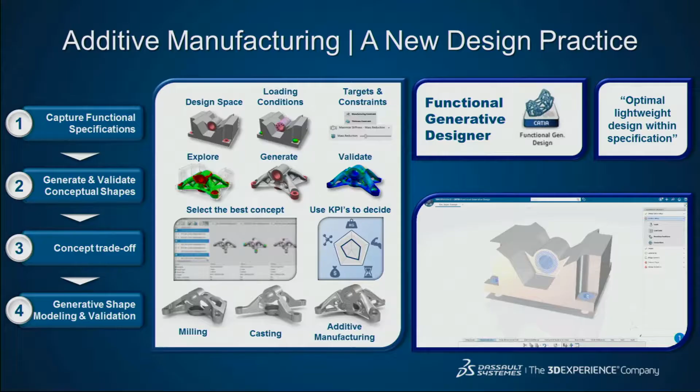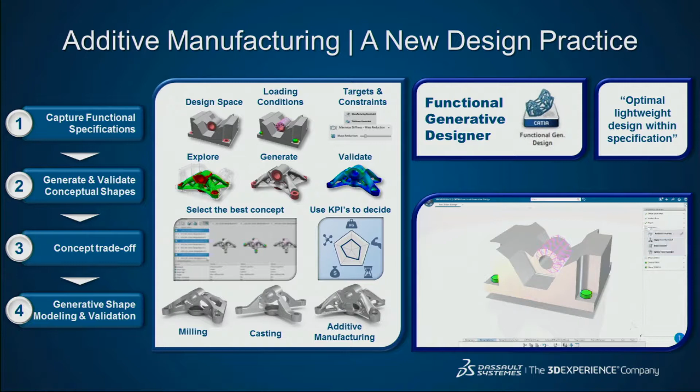So to start off with, we're thinking about the design side of things, and a lot of people are talking about generative design already. So we've got this capability in here. We're looking at the design space you can work in, the loads, the conditions, the constraints. We're looking at different ways of exploring what we can get out and what are the different manufacturing methods. We're not always going to go to additive, we might go to casting or milling or something like that instead. So there are different solutions that come out.

When we look at the topological optimization, there are simple topological optimizers out there, but we don't believe they're good enough because there are small nonlinearities, and if you include those, they can have quite a dramatic effect on the outcome of your optimization. So you need to include them, otherwise you're missing the mark.

We also need to think about, once we've got that topological optimum, how do we actually smooth it down? If you talk to Aldine, this is one of his big bugbears, these rippley surfaces. So you need to first be able to smooth them. Second of all, maybe do some quick, direct modeling on it. But ultimately, our customers are telling us what they really want is a proper, feature-based parametric CAD model. And we can get them there.

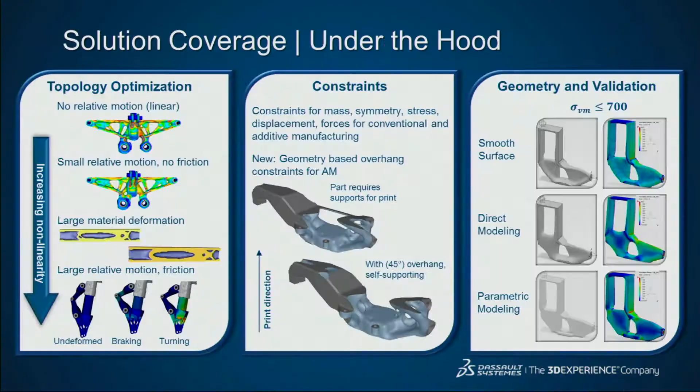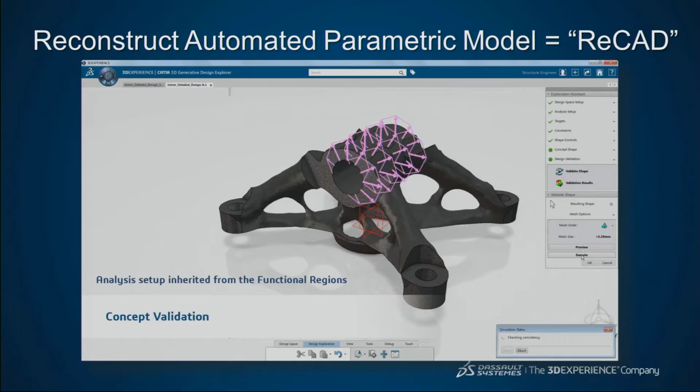So how do we do this? This is a process that we call ReCAD. You're basically taking this kind of dumb lockdown model, a bit like an imported IGES file, and you're now actually rebuilding it as a proper parametric feature-based CAD model. If I jump to this part of the animation, you can see we slice through the model, and it builds and lofts the various different sections, and then automatically rebuilds this model for us. So it's manually controlled, but highly automated. It takes something that could take you hours or days, and allows you to do it in minutes, but you're still controlling it.

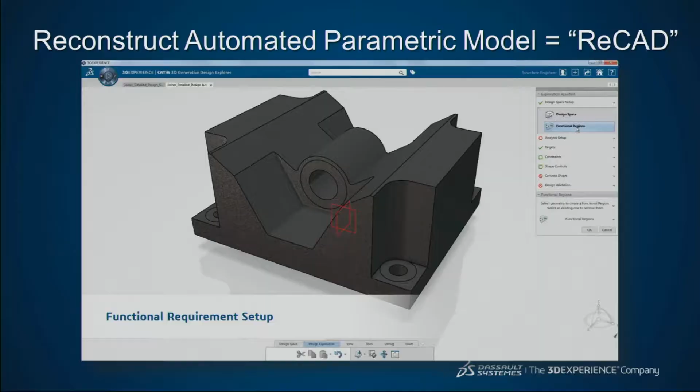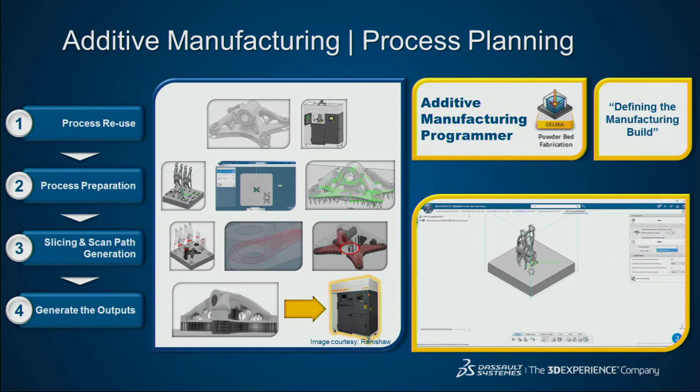We're also thinking a lot about manufacturing, because this is a whole design for manufacture exercise. We're thinking about the orientations of the part, the slicing, the laser paths, all of this kind of stuff, and making sure we include that as part of our modeling. We're thinking about how we're positioning parts—are we having multiple parts in one print run—and are we thinking about the support strategies?

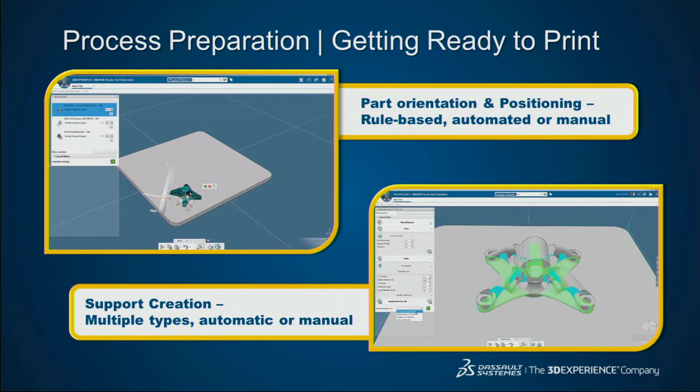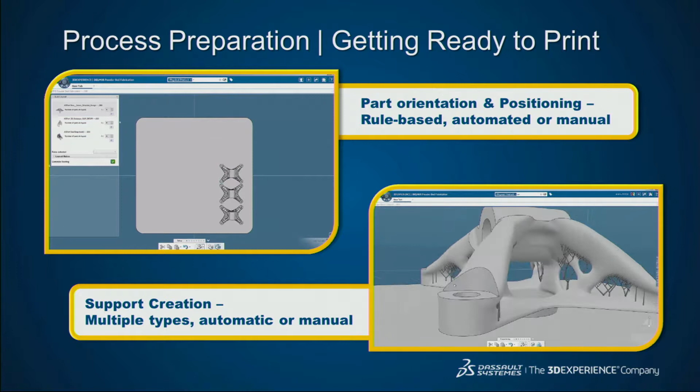I can't compete with what nTopology are doing—they're doing some great stuff there—but we've got some automated support strategies we can put in, where you can take a template, populate it, and just extend it and automate that design. So you've got to follow a company standard.

Most importantly, we're also looking at what the actual specific machine is doing. In this case it's a Renishaw machine, but it could be from any other company, and we're making sure we're modeling what goes on in that specific machine. All the machines are different, so we have to have different settings that we pull out of libraries.

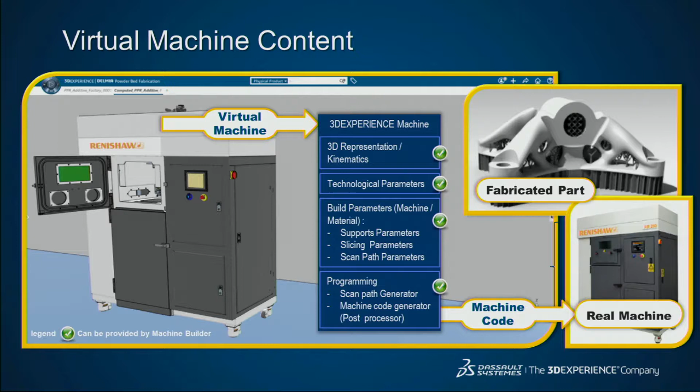Then we get into the bit I'm most passionate about, which is the actual simulation of the manufacturing process itself. You can see we're actually adding material, doing all of the thermal things as well—it's some really powerful, complicated simulation that we're running here.

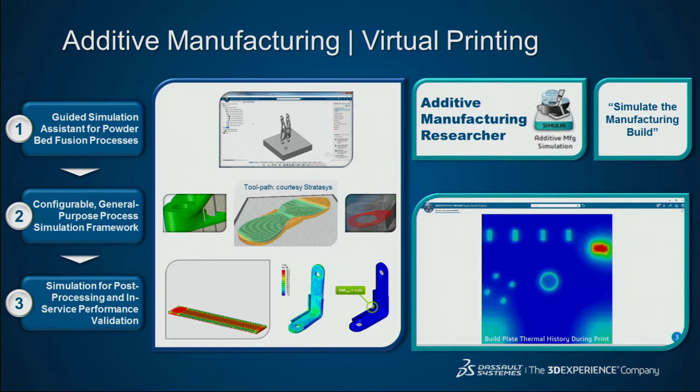We're looking at all of the thermal effects, because you're going through massive thermal fluctuations. You end up with all these weird residual stresses between the different layers, and you end up with warping and distortion. You can also end up with problems where, because of the way the part moves in the printer, the printer can actually stop—and we want to be able to predict where those errors might occur.

We have some customers who are actually having parts that are breaking and failing while they're being printed, and we want to be able to predict if that happens. Because if it's cracking as you're making it, it's not any good, is it?

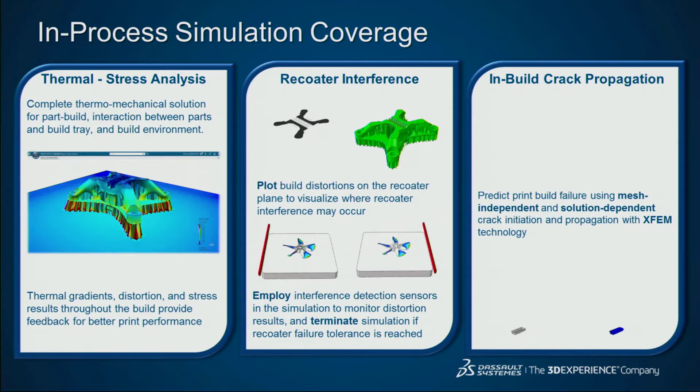We want to think about what happens to that part once you've made it. You take it out of the machine, you're now going to put it onto an assembly or a product, and it's going to have its own in-situ stresses applied to it. You're making it out of metal because you want it to be strong, so it's got to carry quite considerable load. But you've also got to think about those residual stresses that are in it before you've even put your real load on it. And we want to think about durability, fatigue, and how long it's going to last.

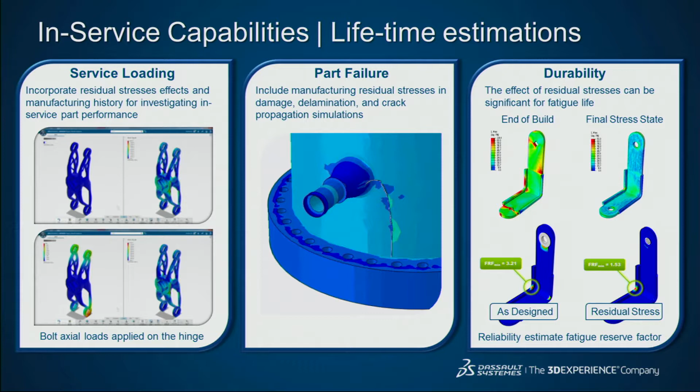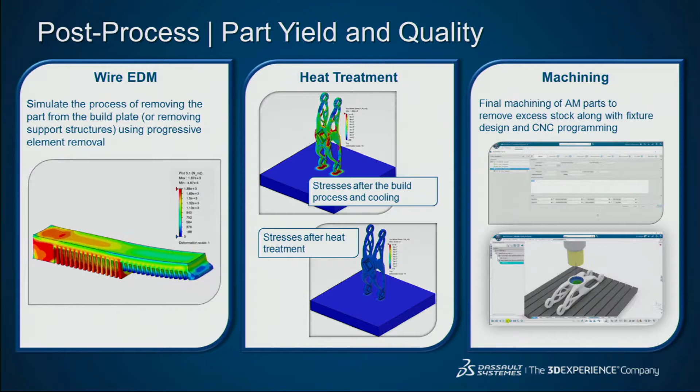We're also going to think about things like machining away the various support structures, and post-machining of the parts, such as where you might have a bearing or something—because often the part that you 3D print is not the final part. You've got to do some additional work on it, and you've got to include all of that in your calculation.

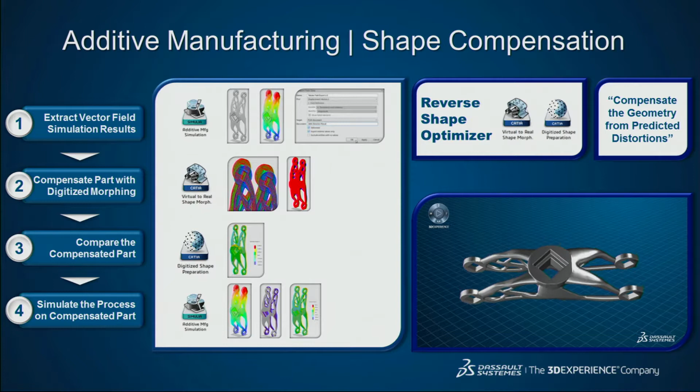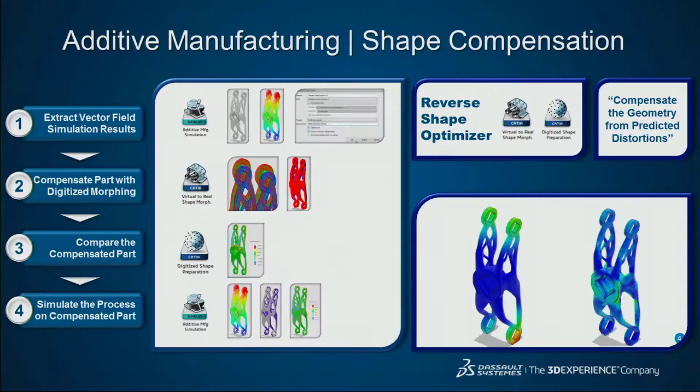This bit I think is particularly cool: we see parts that come out of the machine warped and distorted—it's an inevitable fact of the way these things are printed. What we want to do first is minimize that and understand it. But second, if we understand and can predict it, we can do a reverse morph—we apply that warping to the part before we print it. Then as it's manufactured, it warps into the right shape as opposed to warping out of that shape, so you end up with the correct shape you wanted rather than something a bit off.

If you think about it, what we're trying to do is simulate the process, simulate the physics, and simulate all the different materials. I've spoken about metals, but of course there's a wide range of polymers as well.

We worked with a lot of different companies to validate this. Specifically I'll pull out TWI, based here in the UK, and Oak Ridge National Labs in the USA. But you can also see HP, Stratasys, Purdue, ARL (Army Research Labs in the USA), and Simtech, which is like the Singapore equivalent of MIT.

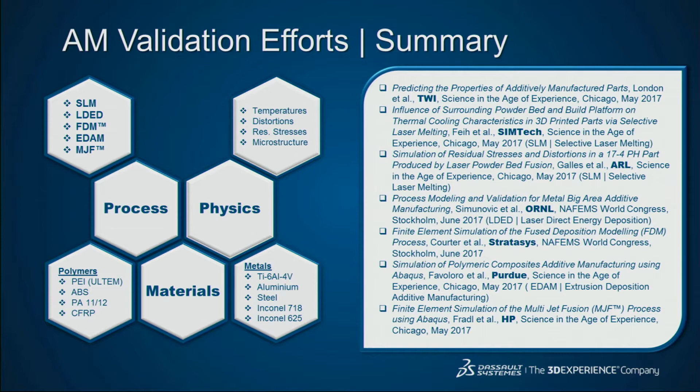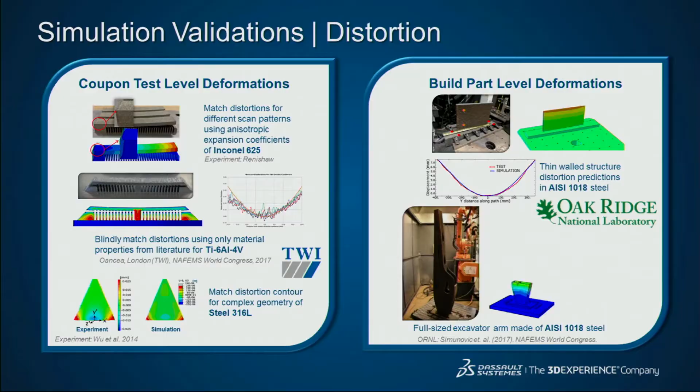So here's a couple of examples, one from TWI and one from Oak Ridge National Labs. These are real products, tested, validated, proven. It's not us saying it's accurate, it's these people — you can go and talk to them, and they'll tell you about it.

This guy at TWI, Tyler London, has done a lot of work. You can see here experiments versus simulations, great correlation. On the right, you can see some defects and porosity problems that they had, which the simulation predicted. That's perfect — it's spotting problems before they occur, so you can do something to minimize or get rid of them.

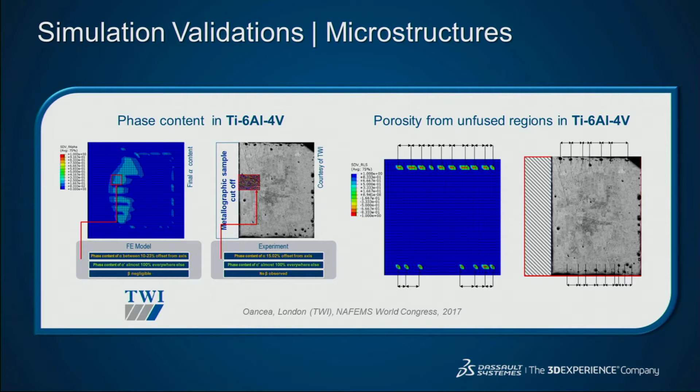Here's some more work that Tyler London has done, first on wire arc additive manufacturing, and second on laser metal deposition. So he's working across all sorts of different materials, processes, methods, and machines.

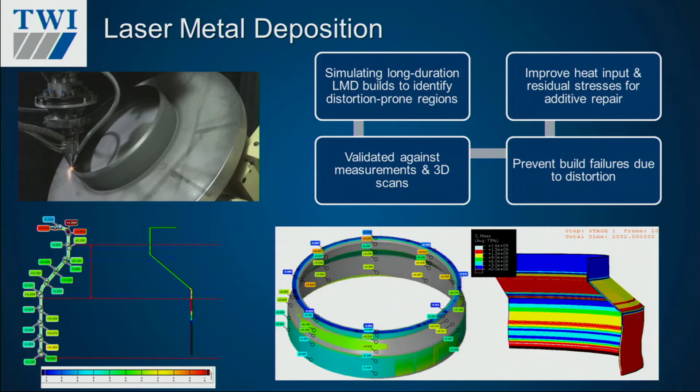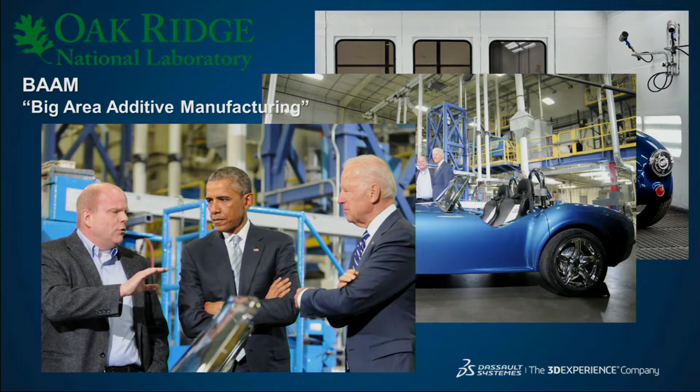Oak Ridge National Lab's glory example was when they decided to create a Shelby Cobra. They got plenty of publicity like this — they basically made pretty much the entire car using additive manufacturing. This was a factory tour they had, with a couple of guests. If you zoom in, you'll see Barack Obama and Joe Biden visiting them. Obviously that dates the slide now, from a couple of years ago.

We're also looking at all sorts of variabilities. Here you can see one particular part, and we're using four different laser paths to figure out different ways we could make it. What's the best one? What are the different variations, and the pros and cons between them all? Let's do that investigation before committing time and money to actually making this part, so that when we do make it, we make it as best as we can.

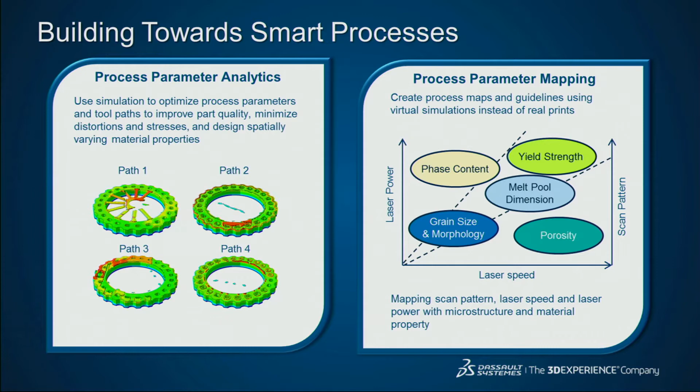So if I revisit the whole set of technology components I spoke about at the start, I think this is the list we need. We need generative design, a good powerful CAD system to manipulate shape, a whole host of different simulation tools such as advanced solving, topological optimization, variation exploration, and durability, and sophisticated, powerful manufacturing and production planning, understanding, and modeling.

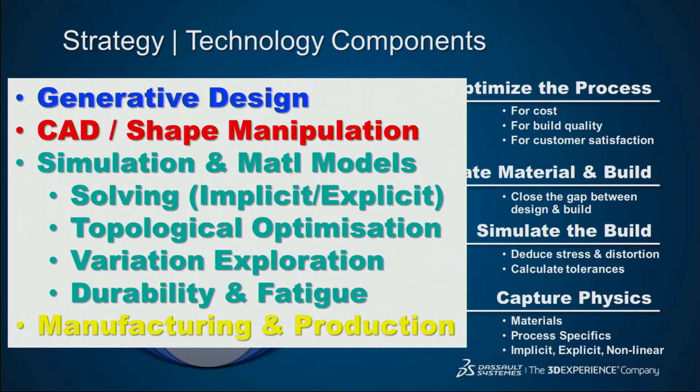Now, as it happens, at Dassault Systèmes we've got all of those — CATIA, SolidWorks, all the Simulia products, and Delmia, all pulled together on the 3D Experience platform. That gives us a very compelling story and a very compelling set of capabilities that seems to be attractive for many of our customers.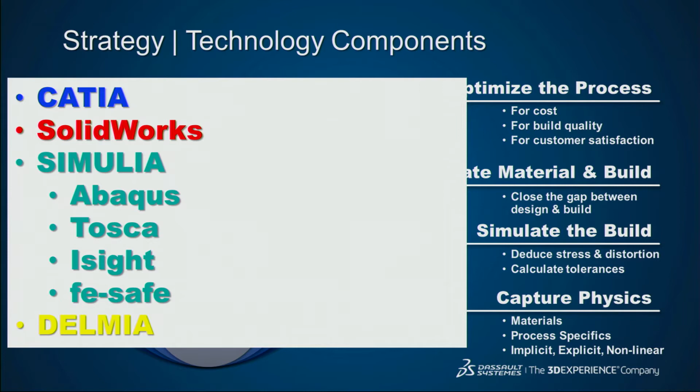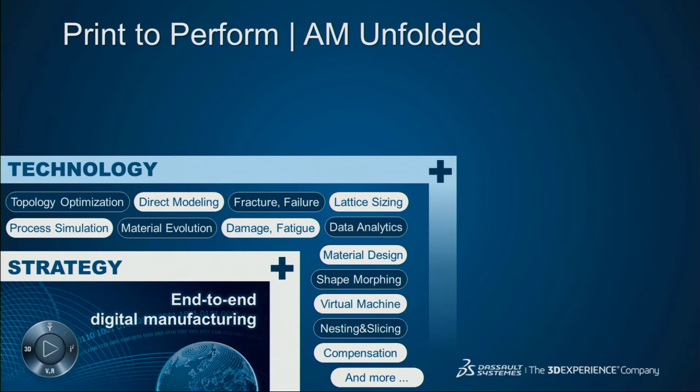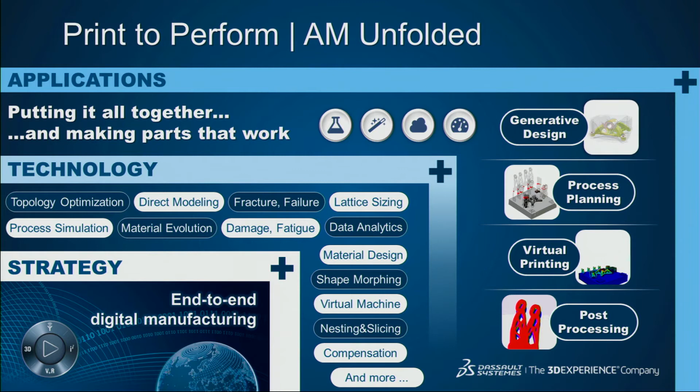If we look at our strategy, we're talking not only about additive manufacturing, but about digital manufacturing — the end-to-end process, the whole thing, not just little parts of it, but how it all comes together. We're looking at all the various technology capabilities we believe are needed to do this properly, and we've developed and acquired those, and continue to develop them. We bring those capabilities together into a variety of role-based applications, so we understand who you are and what you want to do, and put the right tools in your hands — tools compatible with what your colleagues upstream and downstream are using.

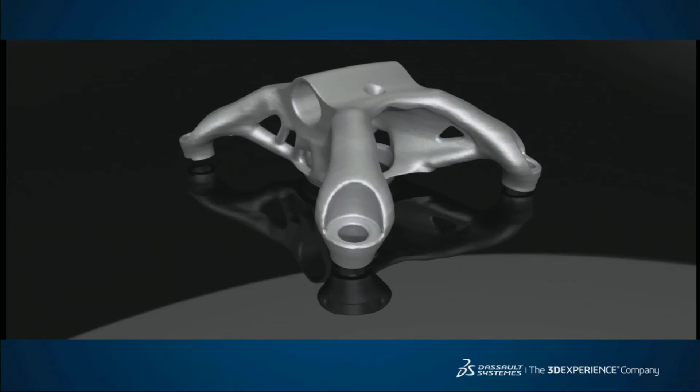And I'm going to leave you with a warping, producing, animating, photo-rendered example of this part. You can actually see it doing a funny little dance as it goes through its warp. Okay, thank you very much.